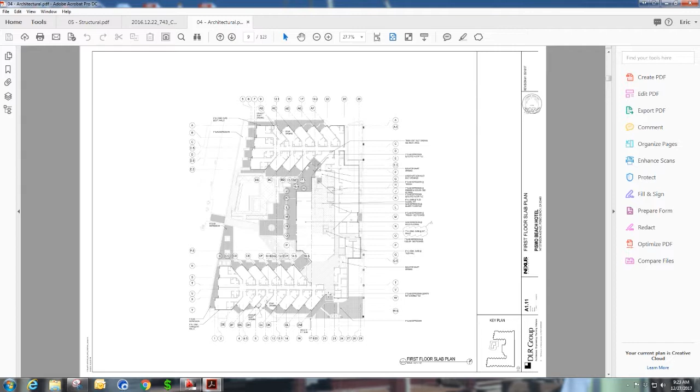This is first floor slab, so there is a podium right here, and then there's a second floor slab which is right here. The difference is in the sections.

On Spring Hill Suites, you have a 10-foot first floor double party wall, top chord bearing floor trusses, which are running perpendicular to the party wall. At Pismo Beach, you have a single 2x6 with joist hangers, top flange, coming in at a 45-degree angle. That's the difference.

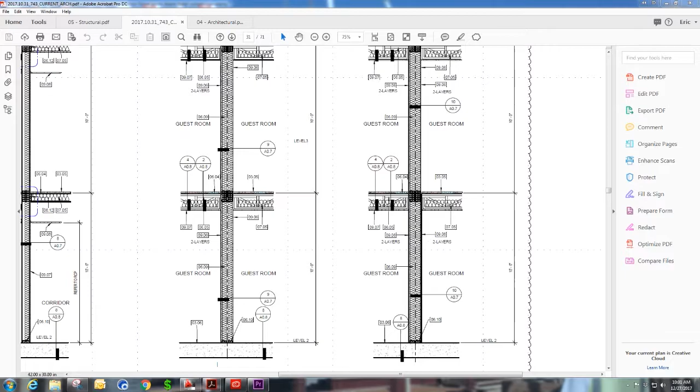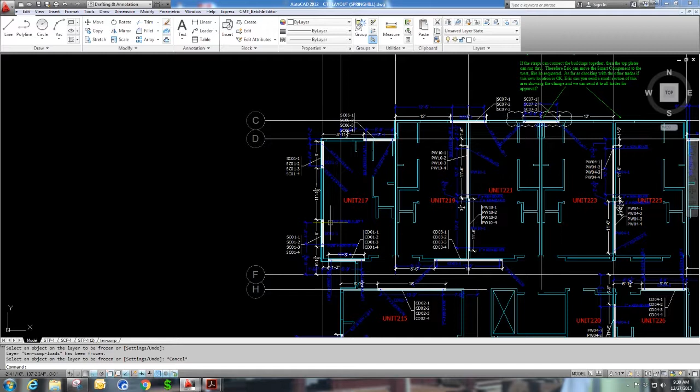And then you're going to need to transfer this load to the next floor above. There would have to be solid framing through there or a beam on top, and then the floor would have to get cut back to it.

So here is where the smart components would be on the exterior, and there's very little distances. This is only showing 2'8". That's not leaving enough room for these sliders, these special sliders that are in here, and a header, post trimmer, etc.

We could possibly do something like a portal. May work, but I need to verify these loads to test this line, if it'll work.

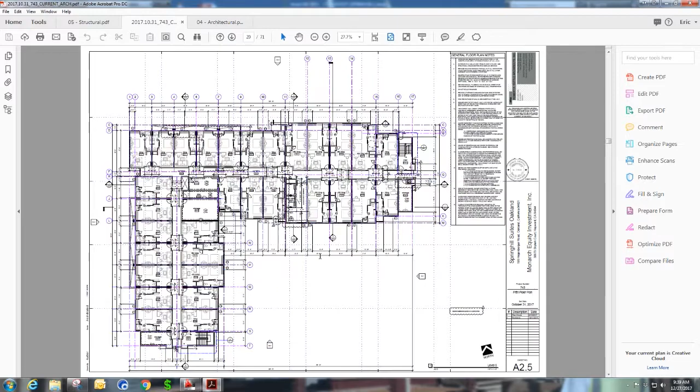Also, on comparing from Spring Hill, we have 2 walls in the party walls versus 1 wall separating the party walls. So there's less areas to put smart components to transfer loads.

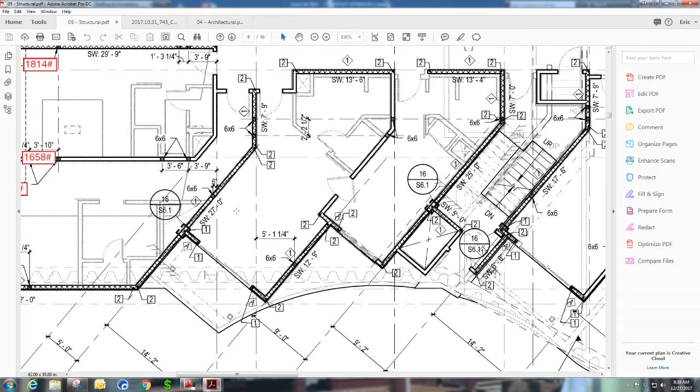The roof framing detail looks a lot similar to this, but in some cases these roofs are running at 45-degree angles in comparison to either the joists or a truss if applicable.

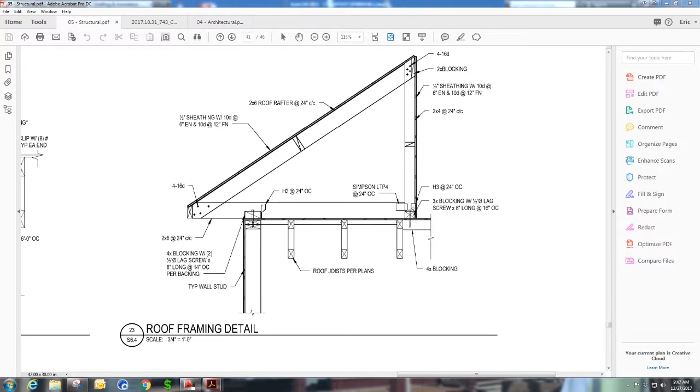Pismo Beach, the roof on it here is kind of a typical condition. Currently it would have 2x12s with 2x6s sistered onto this, and to convert it to trusses, there's not even a way to support this. There's no bearing out here. It's just a massive cantilever hanging the roof off the edges of the buildings.

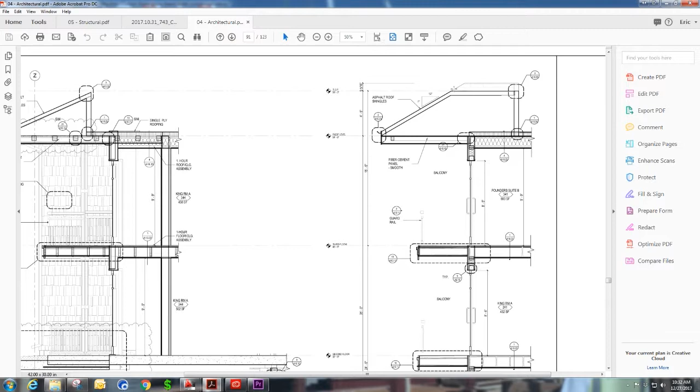So just looking at this job, basing it off of how George and Clavelo like to incorporate all the framing into the trusses, this is not their typical type of project that you can convert. I'm not saying that the smart components will not work, but incorporating trusses to make a balloon condition for the decks is not the typical that will work for George.

The roofs will have to be flat, and then all the crickets would have to be added on, and then all this gingerbread monos on top cannot be incorporated into the truss because they're running at perpendicular conditions or at 45 or 22.5 degrees.